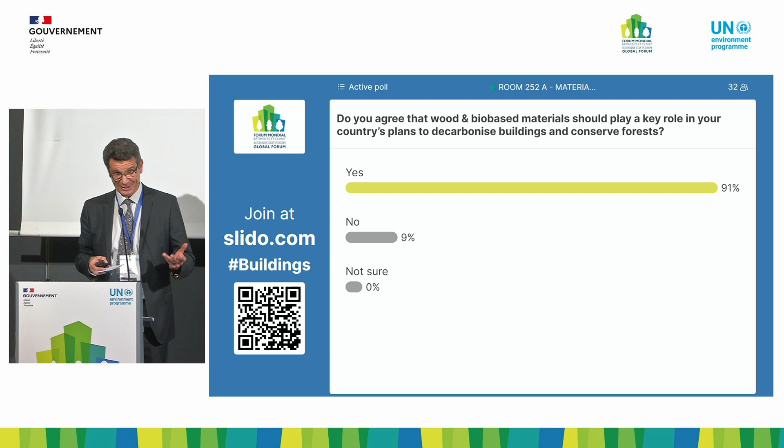All right, now all we have to do is improve on that over the course of this session, right? So the bar is already set pretty high. We've obviously got quite a lot of fans of bio-based materials in the room. So as I say, the bar is set pretty high.

We'll come in a second to Mei Ling, but I just want to say a few words of introduction. Let me just start with a thought. You've already heard this several times today, I'm sure, but I'm going to say it again in a slightly different way. Just imagine for a moment how many houses you've been in over the course of your life, how many offices, how many hospitals, how many shops, how many schools, how many other public buildings.

Can you imagine all of those buildings? Can you then imagine the millions of buildings you've never seen, that you've never set foot in around the world? It's a pretty mind-boggling thought. The idea that over the next 30 years, we are going to build as many buildings again as we already have on this planet - it is a mind-boggling thought. And the idea that we can do that in more or less the same way we have been doing it simply doesn't stack up. We've got to do something radically different.

As you've been hearing through the previous sessions today, including the ones in this room focused on materials, we need to do everything. Of course, we've got to look at operational efficiency, the whole life cycle, all of the impacts of buildings across the life cycle. We've also got to decarbonize the mainstream and typical materials we use - concrete, steel, aluminium, glass, and so on. But we also need to think radically differently about the sorts of materials that we use.

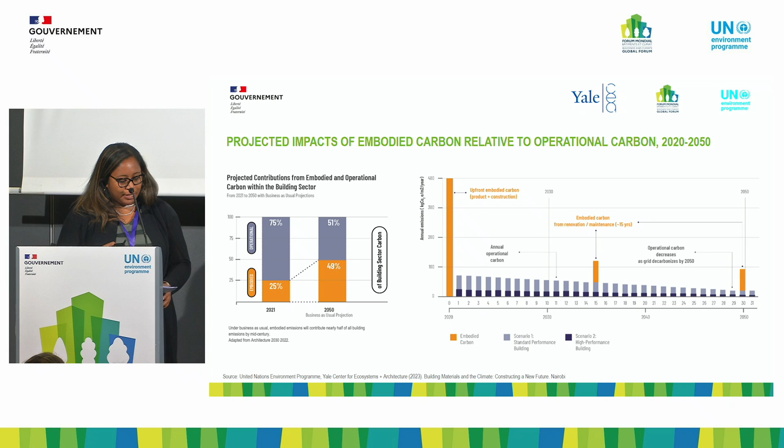So as summarized in last year's global report, Building Materials and Climate, which was done with Yale CEA, UNEP and Global ABC, we know that this requires a simultaneous approach across renewable and non-renewable building material streams, for very different parts of the world that have unique building material demands and renewable material resources.

Renewable materials have a massive opportunity to lead across all three and play a critical role. Firstly, they have and they can continue to lead the way in terms of circular design practices, in terms of avoiding waste and building with less.

Secondly, they can reconstitute a major part of our built fabric by becoming mainstream building materials with whole life carbon benefits that offer opportunities for high quality, healthy buildings and surrounding ecologies.

Thirdly, they can be integrated, and they need to be part of key decarbonization strategies of conventional building materials like cement, concrete, steel, and other materials like plastics and glass.

From being used as a low carbon, non-toxic bioadhesive, replacement for fuel, supplementary cementitious materials, structural reinforcements to finishings, we know that supply chain and processing innovation in conventional materials can offer key opportunities to buy time and to gain the experience that is needed for biomaterial supply chains to mature in the near term and to scale in the midterm.

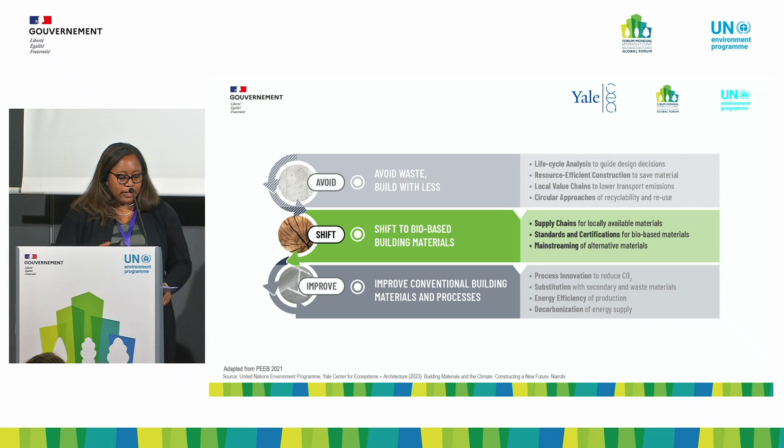Relative to today, the big vision for scaling bio-based materials... sorry, I'm just going to go back. Can I go back, actually? Thank you.

Relative to today, the big vision for scaling bio-based building materials are twofold: to replenish our terrestrial carbon pool, accelerating the afforestation of forests, cropland, as well as our soil carbon storage, and to build a large carbon storage capacity in the built environment, adopting low carbon, non-toxic bio-based building materials.

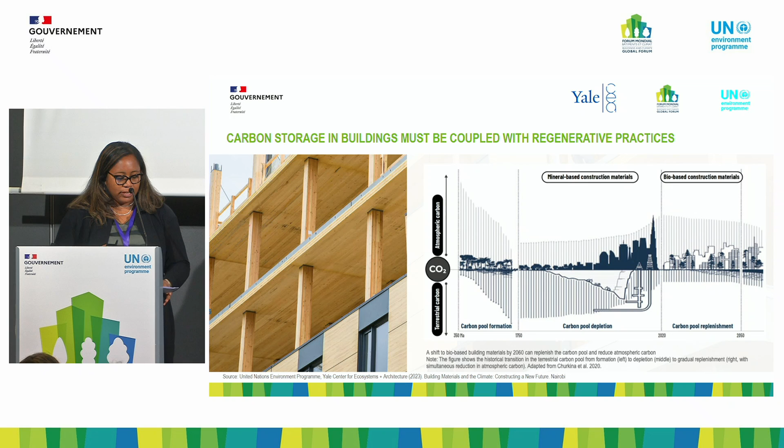Coupling this renewable building material practice with regenerative forest and cropland management is a critical foundation. Timber is leading the way with continued increasing demand for sawn wood, panel and veneer products, with progress in sustainable forestry management, carbon accounting, innovation in timber harvesting, processing, and resultant products, including mass timber. The timber industry is prototyping a critical path forward for its siblings in terms of biomass materials.

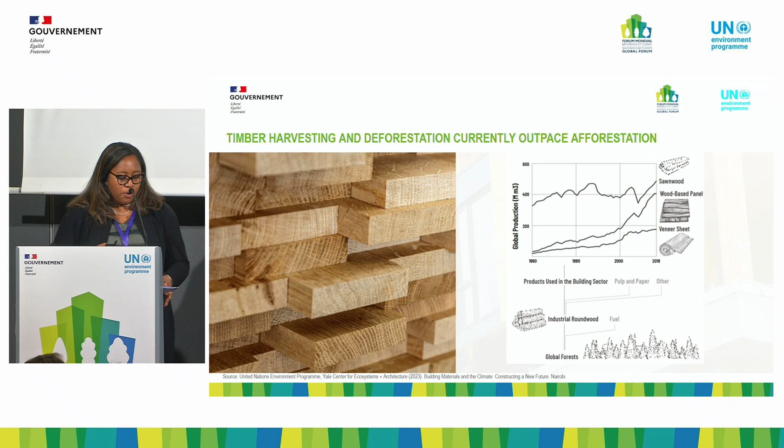It's showing us why prioritizing the use of biomass as high-value products in the building industry, relative to the premature combustion or downcycling of these materials, is a massive opportunity to store carbon effectively at lower costs per ton. Moreover, innovations in timber and mass timber technologies to substitute high carbon steel and reinforced concrete materials demonstrate, across local to regional studies, global CO2 emissions reductions ranging anywhere from 14 to 31%.

Aside from timber, bamboo is a front runner due to its rapid growth between 1 to 5 years and its high carbon sequestration rates at 17 tons of carbon per hectare per year. Not only is it estimated that we have a wealth of bamboo forests around the world, between 35 to 50 million hectares, but they are located in rural communities in the global south that do need to diversify their forms of economic resilience in order to deal with economic shocks as well as climate crises.

Not only can bamboo be used in a host of applications, from structural applications from the foundation to beams to engineered bamboo products, but similarly they can substitute materials like CLT, the substitution of high carbon materials. Similar to what Chris mentioned this morning, a systematic analysis of carbon emissions of each step of the bamboo value chain shows there is caution we have to bear in mind.

We can end up seeing higher carbon emissions with bio-based materials depending on the way we choose to treat, insert chemicals and glues, almost similar to a Botox approach, that force these materials to essentially do things they were not meant to do and form huge toxic problems at the end of life.

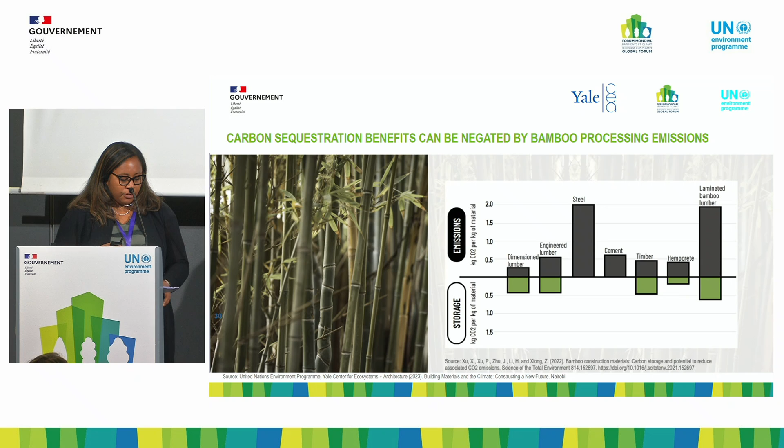Here we see, in a really interesting study coming out of China through the National Science Foundation, the equivalent of laminated bamboo products being similar to that of steel. So there is a huge cautionary tale in terms of the way we go about this.

Diverse streams of biomass from agricultural residues: we produce close to 140 gigatons a year. This is a renewable, fast-growing material stream, not also including invasive biomass from invasive species and forestry offcuts, but this is a massive supply potential. Not only does the capture and use of these biomass waste streams deal with pollution problems locally, but they can be processed at lower embodied carbon rates and adopt circular practices to reduce whole life carbon emissions.

Key leading institutions modeling biomass supply chains show that supply outweighs demand across each continent, particularly in the case of bamboo and straw. But they do face increased costs for production with competing products and market demands that we'll be talking about today.

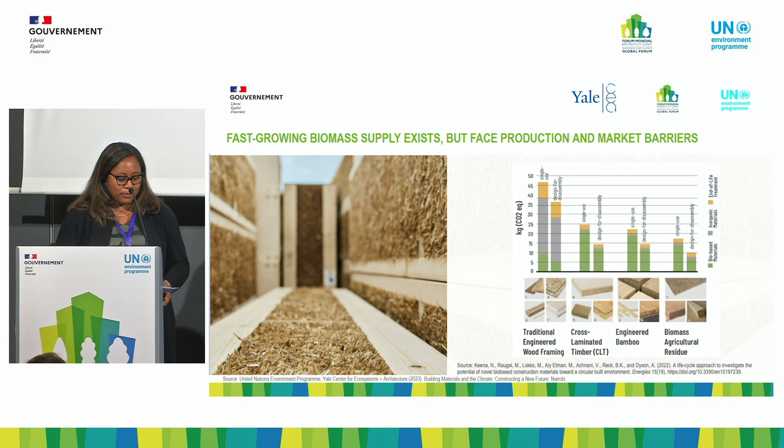Lastly, I'd like to end by talking about something we've been hearing a resounding amount of enthusiasm for, which is the partnership and cooperation needed all along the building material life cycle between stakeholders. We do need policy support, and we're going to hear a ton of examples, but I'd just like to focus on three. We need to incentivize partnerships between local regenerative forestry and diverse global building materials sectors on the supply side.

Policy that builds strategic capacity at a strategic scale to develop local land use, harmonize carbon accounting, incentivize biodiversity, and scale forest and cropland management practices that are sustainable.

We also need to think about critical education and training programs needed for everyone across the forestry to building material sector, to upskill and promote synergistic practices that lead to circular reuse of these materials. At the heart of this is access to reliable and transparent data across stakeholder groups and developing locally responsive bio-based building material standards, centering just practices across material value chains.

This is also the key part, as we said: even if we get the supply side right, how do we parallel shifts on the demand side? Who actually wants these materials? What are the incentives to normalize the adoption and the choices of people to adopt these building materials? We have not necessarily focused a lot on the demand of these materials, particularly in the informal sector, and the role of proactive green certification programs in activating the adoption of these materials.

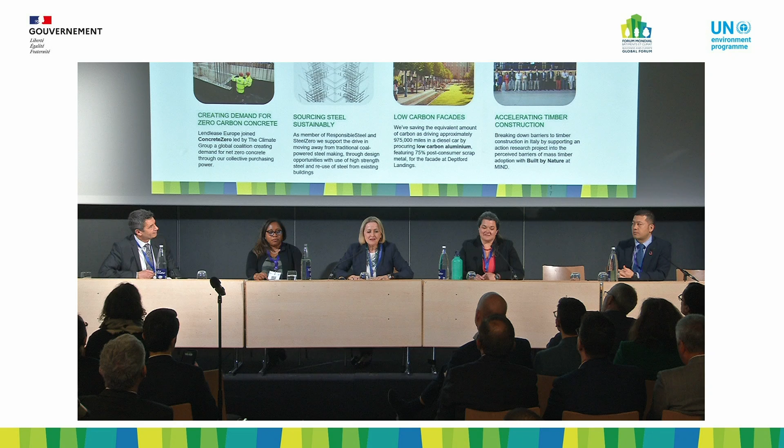Our journey started with switching to electrification for our assets, for our construction sites, and also for our development. This is the low-hanging fruit, Scope 1, Scope 2, the easy part. The biggest part is Scope 3, and this represents 99% of our carbon footprint.

And of that 99%, 96% comes from embodied carbon in the material we use in our development. To tackle this challenge, we are working collaboratively with our supply chain to go as fast as possible in reducing carbon. We joined Concrete Zero to create demand for zero carbon concrete through collective purchasing power.

We have become a member of Responsible Steel and Steel Zero to support the drive in transforming and moving away from traditional coal-powered steel making. But we also procure low carbon aluminum for our facades. Those are some of the examples.

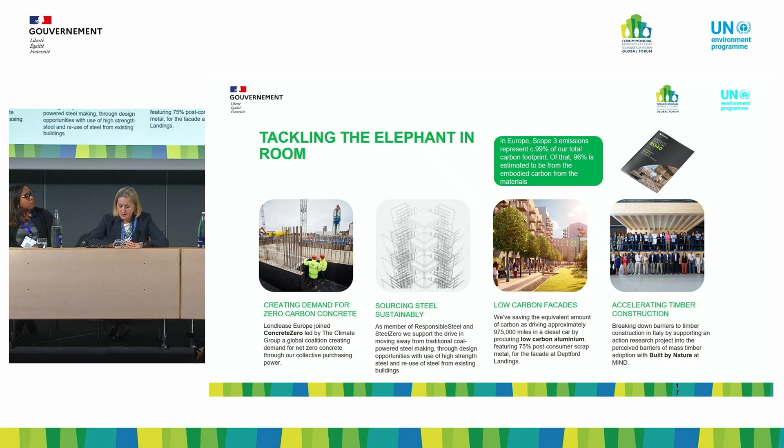But all this will not be sufficient without looking at low carbon materials, as well as bio-based material that we were just discussing a few minutes ago. Just to give you an example, the last image is about what we are doing to accelerate the timber construction initiative. It's a project that is across the value chain, supported by Built by Nature.

We are in the second year. It's about transforming the market and facilitating the penetration of wood in new ways, and I will go back in a minute. Our ambition to eliminate Scope 3 and achieve absolute zero means having clear boundaries to track across our value chain. Last year, we released version 1 of the Scope 3 emission protocol.

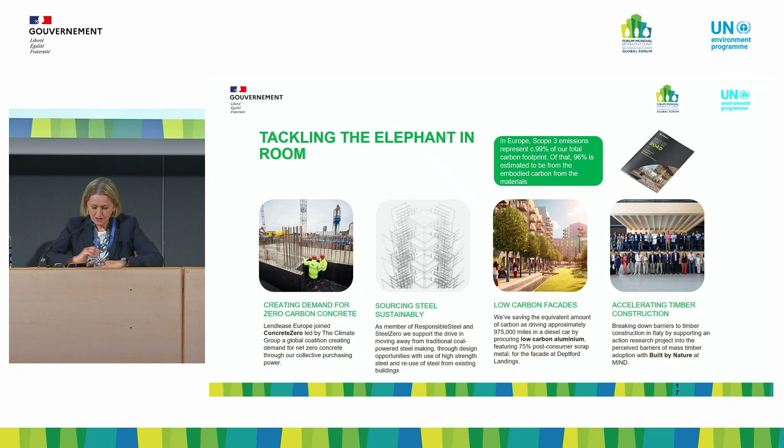We also foster industry partnerships to innovate the use of traditional materials, such as timber. In the next slide, there is an example of what we are doing at Milano Innovation District, which is built on the former site of the World Expo 2015.

For some reason, some of the pavilions were left on site, so we took the opportunity to repurpose those pavilions. What you see is the image of one of those pavilions. We retained 100% of the wood structure that was there, but the innovative part was reaching out to local industry to develop and transform a process to create those big panels.

Those big panels are made of wood and insulation. They are designed for manufactured assembly, so from a process point of view, there's decarbonization there, and it's safer. Foremost, we are very proud that the carbon footprint we are finalizing is about 375 kilos per square meter, very ambitious, at least for some markets and for Italy for sure. In closing, to go faster, we need to move forward together.

We heard that over and over in this conference. We also need a clear decarbonization roadmap that supports industry transformation and investment. A system change is needed in the tools we use, from private as well as procurement specifications. Also, as you were mentioning, May, for upskilling the workforces at all levels. And we also need a new view about assessing risk for these new materials, as well as the perception of cost of this material.

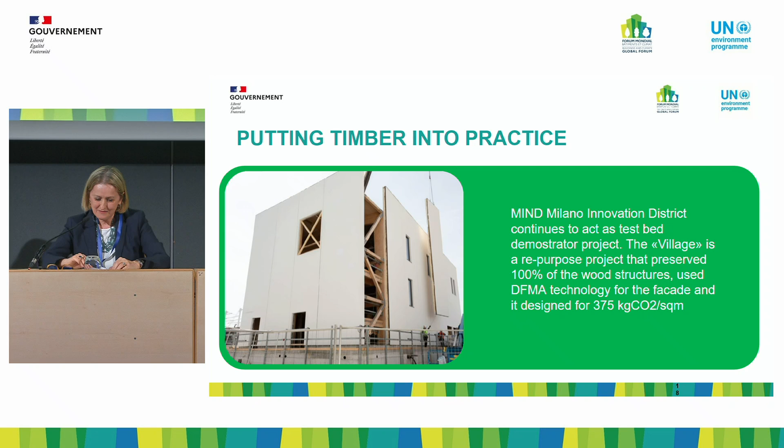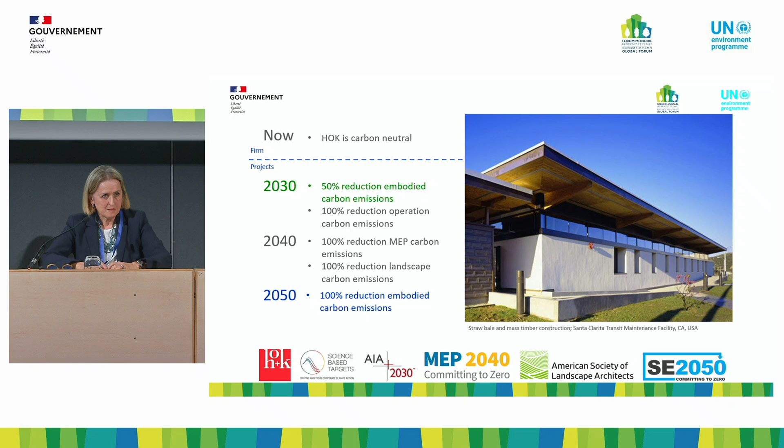HOK is a global architecture firm that has set very ambitious carbon reduction targets. What can you do to influence and promote the use of renewable bio-based materials as a strategy in decarbonising our buildings? We are a global multidisciplinary firm, and we leverage the expertise from all our disciplines to set carbon commitments and achieve them, including operational performance, embodied carbon, electrification, refrigerants, horizontal infrastructure, and landscapes.

We track every single project around the globe and report on these annually. Last year, our global portfolio achieved a 65% carbon emission reduction, and projects were forecast to reduce emissions by over 85,000 metric tons every single year those buildings will be in service. We've similarly pledged to reduce embodied carbon in our design portfolio 50% by 2030 and 100% by 2050. That's structure, enclosure, and finishes.

We cannot get there without the use of timber and biomaterials. We leverage our influence and expertise to influence the market, to change codes and standards, and to do this rapidly to meet the urgency of the climate crisis.

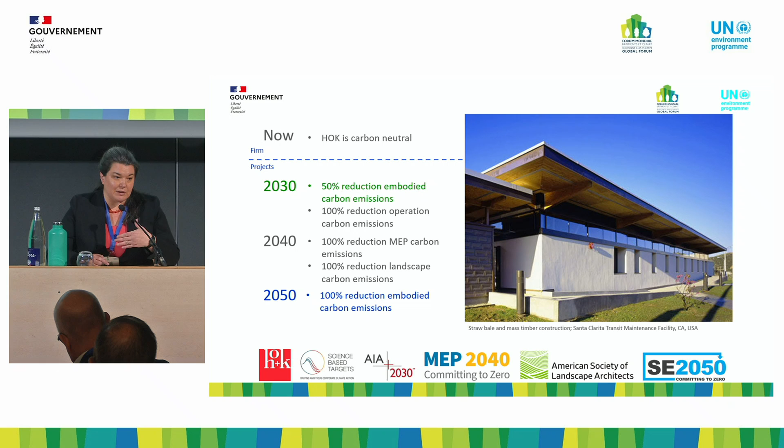As designers, we advocate to our clients the use of timber and bio-based construction materials, and we are especially focused on large, high visibility, and public access projects, which may have a larger impact on rapid market transformation by influencing manufacturing, construction practice, and consumer awareness. We often advocate for hybrid solutions, as we find an all-or-nothing dichotomy does not advance market acceptance of new materials as quickly as needed.

Building codes have evolved to remove many of the historic barriers to the use of these materials, which inherently reduces project delivery time and therefore the costs and risks of escalation. We've also identified productive intersection with building energy codes.

For example, on the SeaTac airport project, we used glulam beams, which are inherently thermally resistant. It helped us meet Seattle's very stringent building enclosure requirements without thermal breaks. This resulted in net cost savings to the project compared to traditional structural materials. It also increases the future demountability and adaptability for the airport.

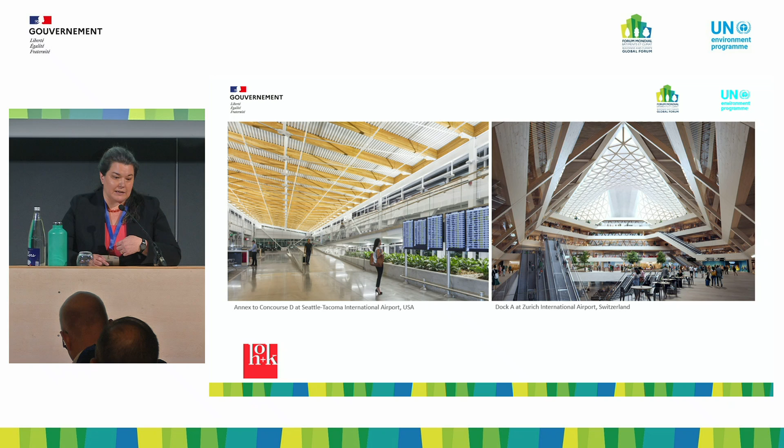As one firm, we leverage our influence over hundreds of millions of square feet of construction every year. As chair of the LEED steering committee, I am leveraging our firm's expertise and experience to support the development of LEED V5 with emphasis on whole life carbon. That will be out for public comment next month, and we hope to get lots of feedback from those of you in the room.

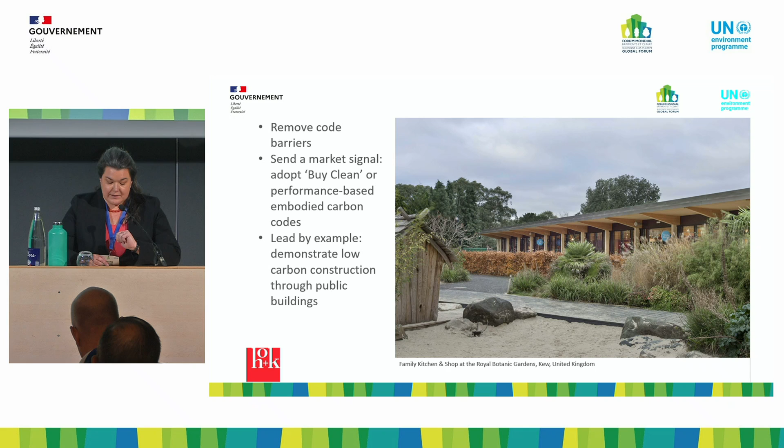What the building industry really needs to successfully scale up rapidly the use of timber and bio-based materials: clear policy signals, codes that measure and limit whole life carbon, incentives to jumpstart the transformation of the market, and demonstration through high visibility, public access, and publicly financed projects. We know that policy changes and leadership of the design industry can accelerate normalized use of timber and bio-based materials in construction.

Thank you very much, Annika. Thank you.

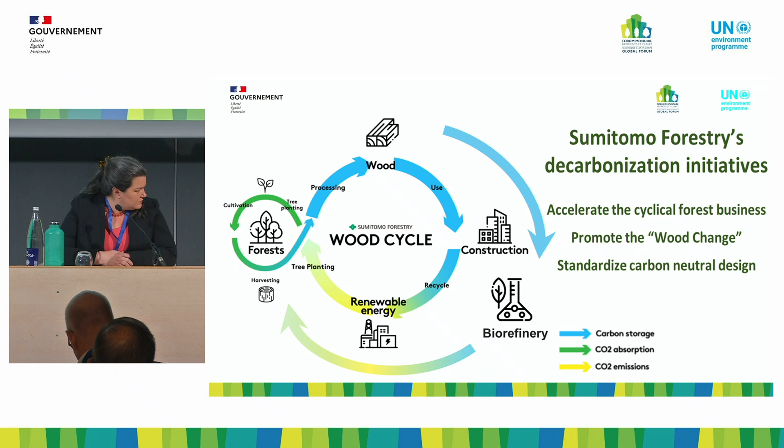And now, Onsan, Sumitomo has a very long and proud history in both forestry and in buildings. Why do you see timber buildings as a good investment for the future? Thank you, Paul. First of all, as you are all aware, reducing GHG emissions in the building sector is a big challenge we are facing now. We believe utilizing timber is one of the best ways to overcome this challenge.

This has already been mentioned, but I'll repeat: wood is a low carbon building material, which helps us reduce the embodied carbon of buildings. On top of that, trees absorb carbon dioxide while they grow and store carbon internally. By utilizing harvested wood in buildings, carbon is stored for as long as the building is used, so it is safe to say we can store carbon for a long period of time. After harvesting trees, we replant new seedlings and grow them, and they absorb more carbon dioxide.

Cyclical and sustainable forest management is what we have been practicing for the last 300 years. Please look at the slide. This image is something we try to visualize what I just explained. We call it a wood cycle.

It starts from forest, where we grow trees that absorb carbon dioxide, and we bring harvested wood products into the cycle of usages with the stored carbon. What we are trying to achieve throughout our value chain is to create and run more cycles or bigger cycles in this image. If we can run multiple cycles or bigger cycles of harvested wood before we release the stored carbon, it will mean that we are securing time to regrow new generations of trees.

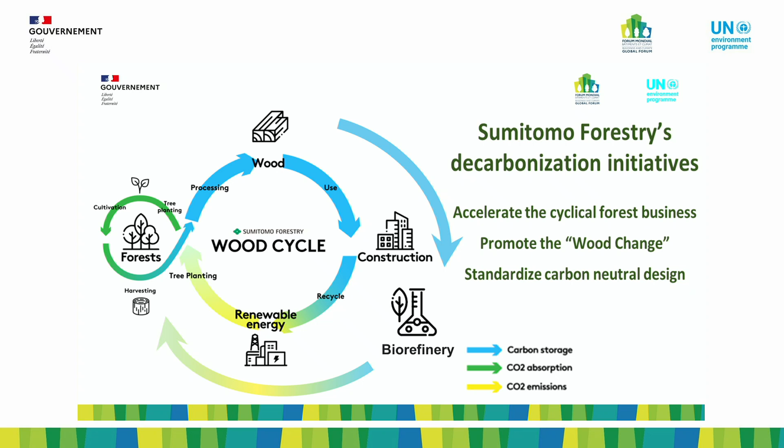Okay, I think when we look at the case of timber, especially mass timber, where they're leading the way, we know that that is primarily concentrated around pioneer tree species, ultimately 2 or 3, that are being used in this categorization of mass timber products. So these are mass pioneer trees. And how do we actually promote a much broader range of tree species alongside that of biomass?

Biomass and timber have had historically tense relationship. The growth of supercrops and biomass has typically been associated with deforestation, and the growth of monoculture mass pioneer trees has usually eliminated the proliferation of crops.

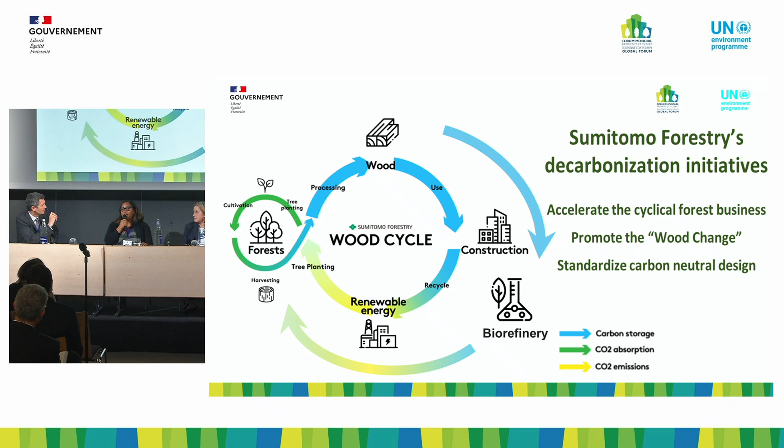Are there sustainable ways for having multi-crop species so that we don't necessarily, when we attach the agricultural or biomass building material life cycle to actually planting and crops, aggravate some of the negative impacts we've seen in terms of biodiversity loss, as well as a whole host of other environmental impacts, including erosion and higher CO2 emissions. And so thinking about soil health at the end of the day as the ultimate growth in terms of forest, cropland management and timber is going to be key.

And that also builds, as we described earlier, this economic resilience, so that food and shelter are actually part of the same equation. We've seen the disastrous impacts when we prioritize one plant above all.

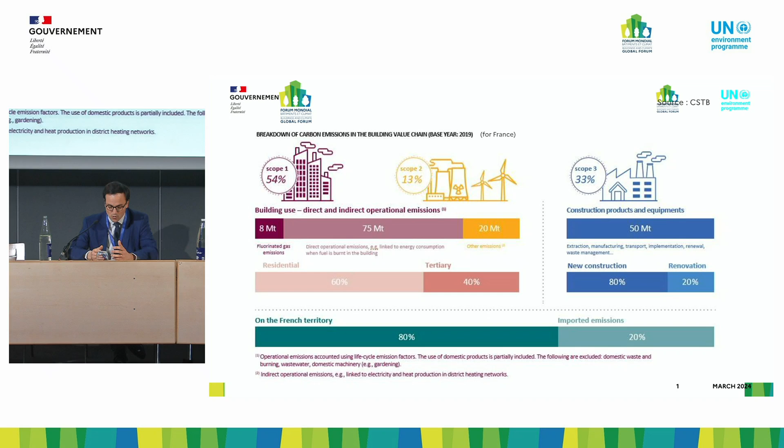You can also see on the breakdown the repartition between the residential and the tertiary part. Having said that, we have at European level and at French level very ambitious decarbonization targets.

As far as the building sector is concerned, we set a new and innovative regulation a few years ago, called Environmental Regulation 2020, which addressed several goals: improvement of energy performance of buildings, adaptation of buildings to future climate conditions which will be hotter in summer, so summer comfort is taken into account, and of course the decarbonization of both the operational phase of the building and the construction phase itself.

Basically, we looked at the whole life cycle of the building, and we set binding targets to achieve. It is a result-oriented regulation, which means we don't say you have to put 12 centimeters of insulation in your walls. We say you have to reach this level of performance, and we let stakeholders have the freedom to reach this target with the means they choose.

This is the first regulation in France, and maybe one of the first in Europe and in the world, which fully takes into account the value represented by the carbon storage of materials, notably in wood or bio-based material. Because of course an emission in 50, 60 or 70 years does not have the same impact on the environment as an emission today, and we have to deal with climate change and global warming today, not in 50 years. So it's very important for us to take this into account.

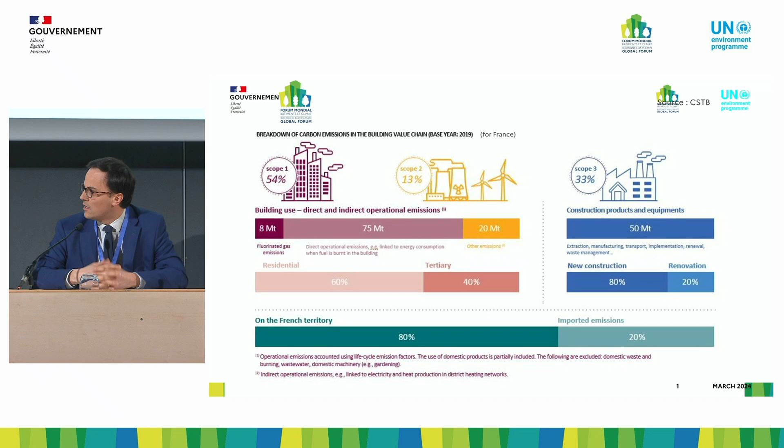Last but not least, public procurement plays a major role, of course. A French law of 2021 provided that by 2030, 25% of new public buildings or major renovations to public buildings should include bio-based material or low carbon materials.

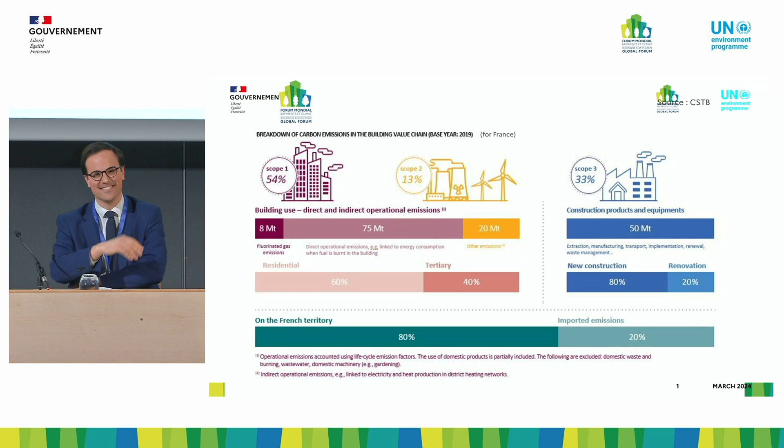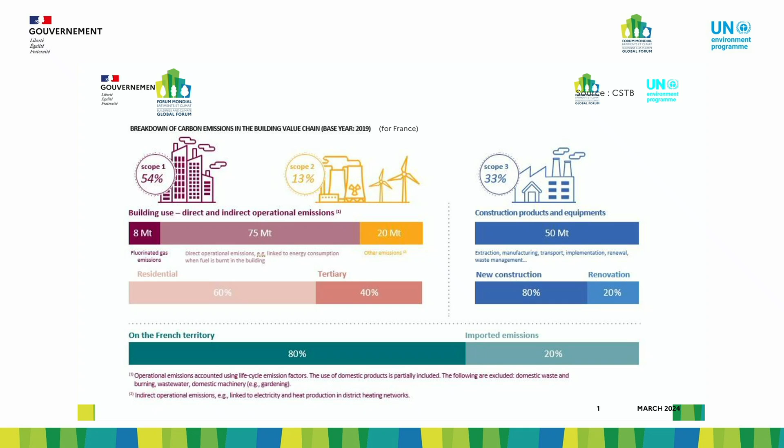So in this gallop through our agenda, I'm now going to turn to Simone, who's the director of the Carbon Neutral Cities Alliance. Simone, CNCA works with cities around the world that are aiming for carbon neutrality. I'm sure they're juggling many different priorities, and few of them have experts in low carbon buildings, let alone bio-based materials. So what can CNCA do to help, particularly at a city level?

Thanks, Paul. It's great to be here, and we're very excited to be launching today our city handbook for carbon neutral buildings. As Paul mentioned, we work with cities across the globe who have set very ambitious climate targets, often far more ambitious than national or international targets, and are therefore grappling with new and emerging policy areas and emissions to tackle that others are just starting to take on.

And so we support our members, who are generally the climate leads of vanguard cities, in exploring these new policy areas. A few years ago, our members came to us and let us know that they were beginning to grapple with embodied carbon in the built environment, and were really looking to flesh out the policy approaches and levers at their disposal to try and reduce embodied emissions in the built environment.

We developed a policy framework with over 50 policy levers that cities could activate to achieve their goals. We've been working with cities in implementation since then. Specifically, we've been working with a cohort of a dozen cities in Europe to contextualize this policy framework and really try to understand what in the local and national context is feasible for cities across different geographies.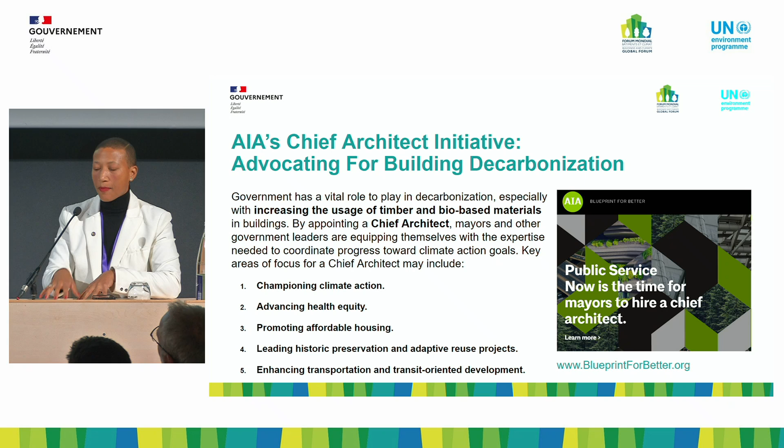If we go to the last slide here, I just wanted to provide some resources for my architects in the room, those who raised their hands earlier. These are some specific resources you can use to take back to your company or even share with your city government leaders or other government leaders to help translate the technical information we are trying to navigate here at this forum, and make it plain and accessible to those who are able to make policy decisions that will help us move the needle.

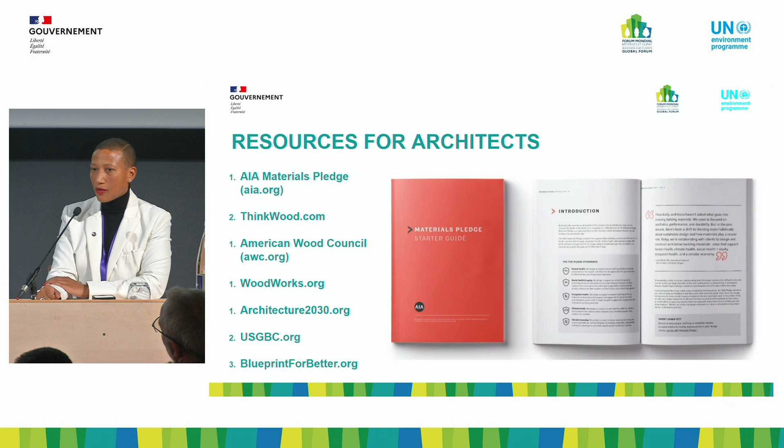So that's it, if you go to the next slide. I will just say thank you for listening, and look forward to any final questions that you have for us.

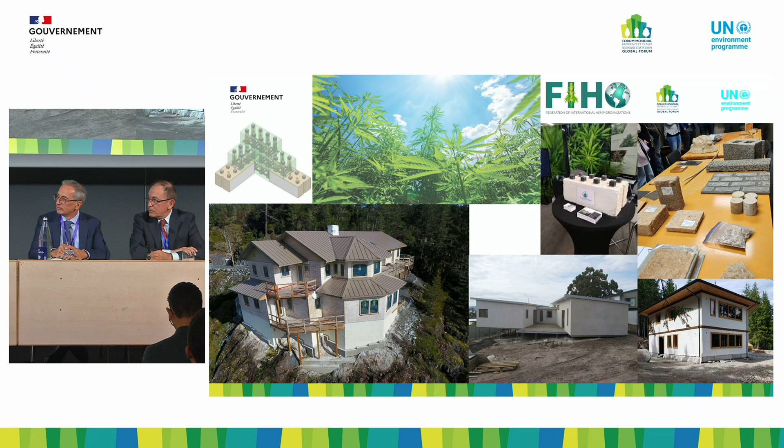Reminding us we're not just talking about timber, we're talking about a range of different materials. Tell us a bit about hemp, a very new, old material, I think.

Thank you, Paul. It's no wonder that I'm the last one to speak because this plant is kind of a miracle, so it's the solution that you're looking for. Just to tell you a little bit the history of hemp: before the Second World War, it was one of the most cultivated crops in the world, and it's one of the most ancient crops domesticated by humankind. But the chemical industry killed the hemp sector in the 20th century because a lot of the applications used with hemp were replaced by nylon, plastic, and other chemical materials.

But now we are rediscovering hemp, thanks to promoters and believers of this plant. And hemp has many potentialities. It is a carbon stock, like other plants we saw earlier today. It's a forest that grows in 3 to 6 months. I don't know if you've ever seen a field of hemp, but it grows up to 3-4 meters high in that time. So it's a new forest growing very fast, and the capacity of hemp to store carbon is quite extraordinary. When it's used for hempcrete or other building materials, then of course it's very interesting.

Today there are many different materials that have been developed. I have some samples here. We can do hempcrete, we can do plastic, we can do cardboard, and many others. If you want to see them, you can go on the Global ABC booth, and there are some samples there.

But what I wanted to say is that we still need to work on many bad ideas about hemp. Of course, hemp is a cousin of cannabis, so in many countries it's still regulated as a narcotic plant, which is completely wrong, because industrial hemp is not at all a narcotic. France is a pioneer in cultivating and promoting hemp, so thank you for that, but also China and Canada and other countries. Now there's a big possibility for hemp to be developed in developing countries because it's a plant that can be processed and transformed locally, creating jobs and activities for farmers and industrials.

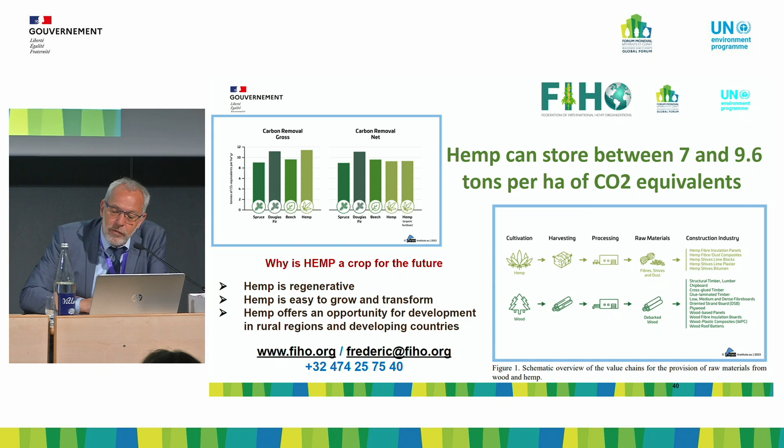Also, there's one element that is very important: affordable construction. Hemp can be used — if we go to the previous slide, you see some examples of buildings. Some countries in Africa, and the African Union, have big programs for building affordable housing, and hemp is something that can be used there, but we still need investors and support from development banks and partners to do that.

I'm here with colleagues from companies invested in hemp, Just Biofiber and Natural Fiber Technologies, so you can meet them during the forum. Join us and make sure you go on our website and support us, and we'll be very happy. Thank you very much, Frederic.

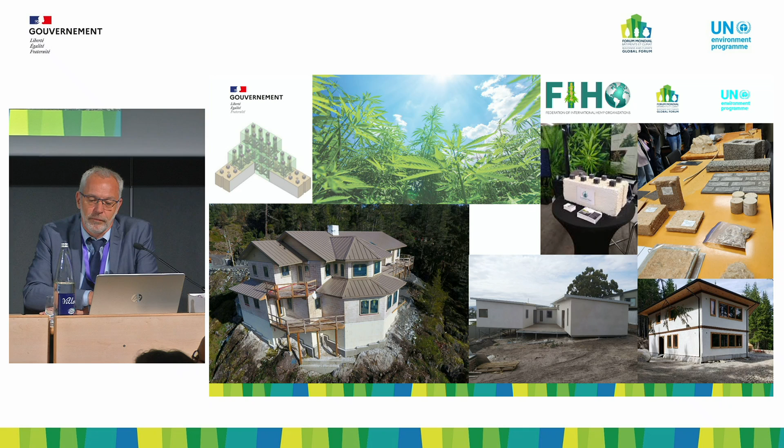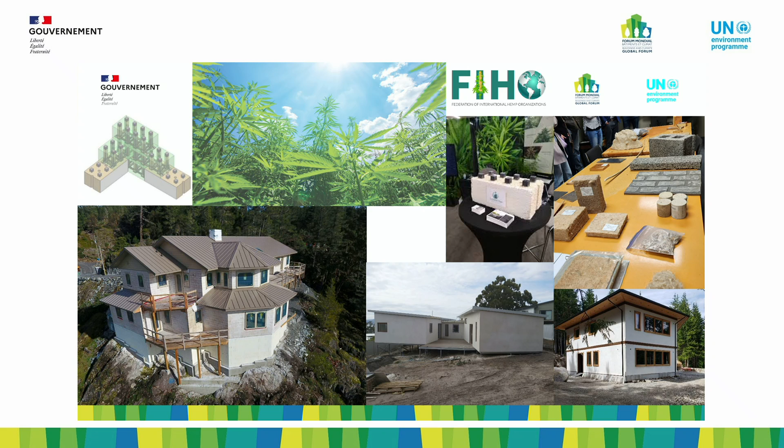As I've said a couple of times, that was quite a gallop. The last hour and a quarter has flown by. We've toured the world and begun to tour the world of bio-based materials. There's a lot there, and it would have been lovely to spend more time unpacking those topics. But I hope we can stay in touch, and I want to say a bit more about that in just a second.

Just to recap, through this session you've heard from leading businesses who are really grappling with how they can decarbonize their buildings. Yes, they will be driven to look at ways to decarbonize concrete, steel, aluminium and glass and other materials, but increasingly they've got to supplement those with bio-based renewable materials as well.

We've heard from leading government action, not least our host, the French government, showing innovative approaches both to policymaking and to applying these principles to public procurement, showing leadership there. That's so important because the industry is so dominated by a relatively small palette of materials. We need to create opportunities to give these new entrants, many of them very old materials of course, a leg up to get a level playing field where we can access and source these materials on an equitable and affordable basis at scale.

But we've also heard from leading intergovernmental and non-governmental organizations. As we said at the beginning, while there are huge opportunities here to potentially help decarbonize our buildings, and also, if done in the right way, to drive investment in the right sort of forest management and reforestation programs, there are inherent risks of getting this wrong. I think that's why it's so important that we begin to extend our community.